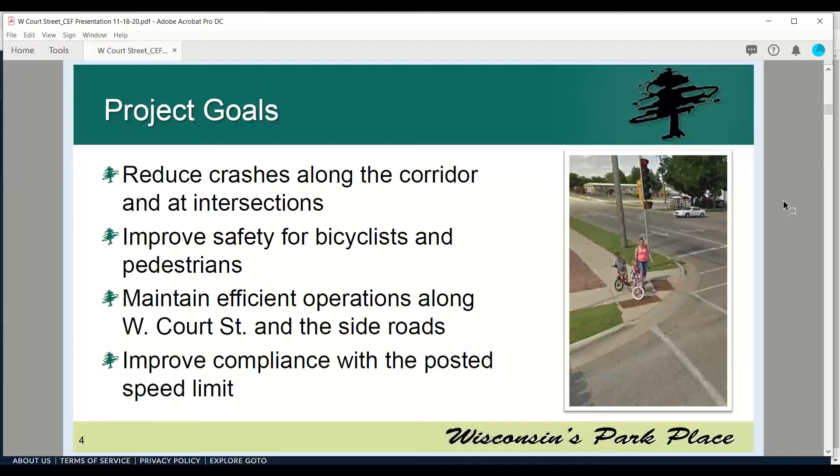Next slide please. So there are 4 primary goals for this project, and it's the reason we are here talking about safety improvement projects on West Court Street. We want to reduce crashes along the corridor and at intersections. We want to improve safety for bicyclists and pedestrians along the corridor. We want to maintain efficient operations along that corridor and the side roads that intersect it. And lastly, we want to improve compliance with the posted speed limit. So those are the 4 primary goals of our project.

With this data, we are drilling down and looking closely at those intersections to identify opportunities to improve safety and look for ways to implement safety improvement projects. And that's where we get to applying for federal aid. There are safety grants and federal aid programs available to help pay for those safety improvement projects.

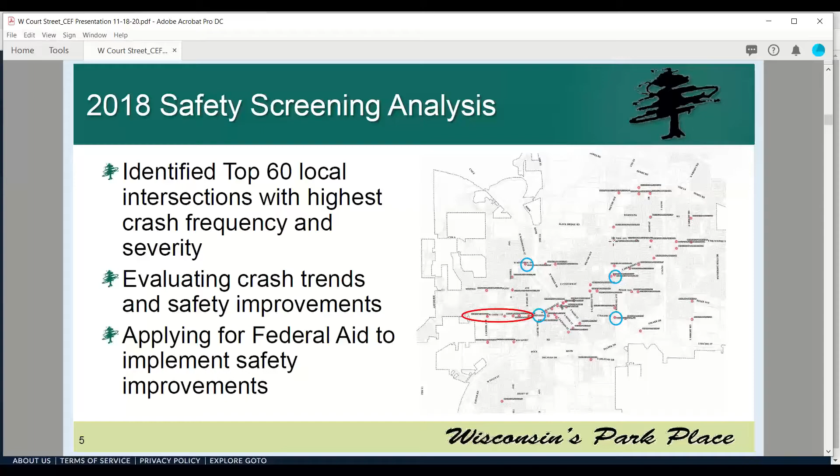You'll see here I've got highlighted, if we want to back up one more, I just want to identify what those circles are. The 4 blue circles on that screen are 4 locations where we've been successful in obtaining federal aid for safety improvement projects. And that red oval identifies really what we're talking about tonight, the West Court Street corridor.

So if we look more closely at that West Court Street corridor, we see that 5 out of the 14 intersections are in the top 60 list. And by 14, I'm talking from Waveland all the way to Pearl Street. So for that length, there are 14 intersections, 5 of which are in the top 60 list. That's over 1/3 of the intersections on the corridor.

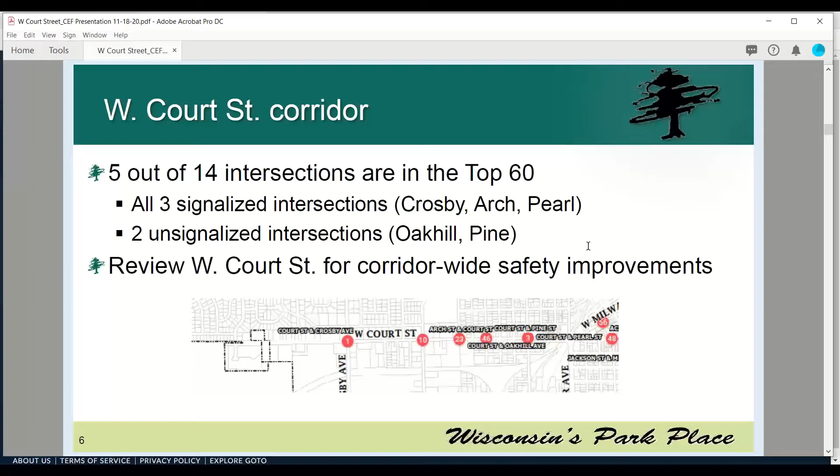I will point out that those include all 3 of the signalized intersections, with number 1, Court Street and Crosby Avenue being the number 1 highest intersection with the highest economic loss in the city for local intersections. And then number 3 is Court Street and Pearl Street. So when we look at that top 60 list, we're identifying some pretty significant intersections where we could see some safety improvements. But knowing that there were so many intersections on that list, we really wanted to evaluate Court Street as a corridor and look at safety improvements that could be implemented along the entire corridor.

That brings us to the 2018 traffic and safety study we wanted to conduct. The limits of that project include a 1.3-mile corridor that goes from Waveland, on the west side of the city, extended east to Pearl Street. We looked at the corridor as a whole, but we also looked very closely at 6 of the intersections and evaluated traffic operations for those 6 locations. Those 6 locations include the 5 that were in that top 60 screening list, and then the T intersection at Grant Avenue.

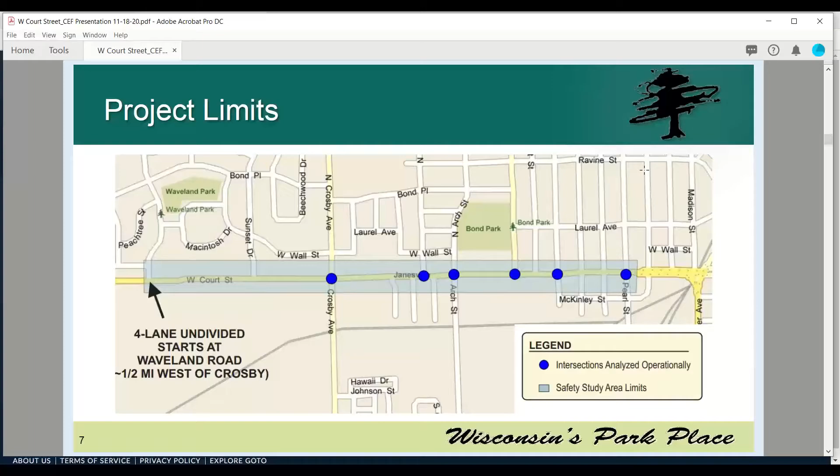For the 2018 traffic and safety study, what were we looking at? We're looking at 2 things: safety and traffic. So we want to first identify what crashes we're seeing on the corridor. We're going to identify some crash patterns, and then determine some safety improvement solutions. But we also want to evaluate operations on that corridor, so we want to evaluate the traffic.

So we collected traffic data at the intersections to get turning movement data. We forecasted those volumes out for a 20-year design life up to 2043, because we know we're going to see additional traffic growth on that corridor. We want to plan for that. We also want to evaluate the operations with any modifications we might be considering based on implementing safety improvements. What we don't want is for our safety improvements to compromise traffic operations. We want to improve both of those things, and that's why we're looking at both the safety component and the traffic component.

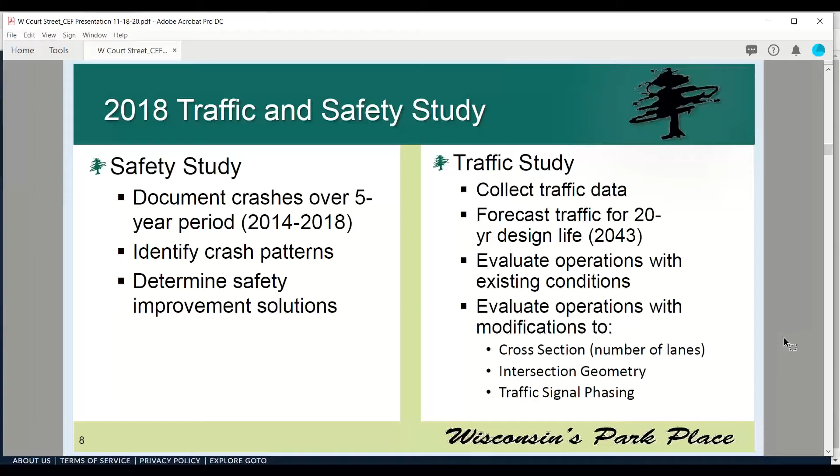The results of the safety study illustrate, unfortunately, that West Court Street has a lot of crashes. It has more than we would expect on this corridor. Over a 5-year period, from 2014 to 2018, there were 164 crashes along that corridor. That includes 2 fatalities, 1 incapacitating injury, and 20 injury crashes. Also of note, those crashes included 16 bicycle and pedestrian related crashes. And as we all know, a crash with a bicyclist or pedestrian tends to result in higher injuries because we're talking about vulnerable users on the roadway. Overall, the corridor crash rate on West Court Street is more than double the statewide crash rate.

On the right, it shows an image of a collision diagram. Basically what TADI did as part of this analysis is map out the locations of every crash along the corridor to identify trends and potential solutions for how we could reduce those crashes. So that's what we're looking at from a safety perspective.

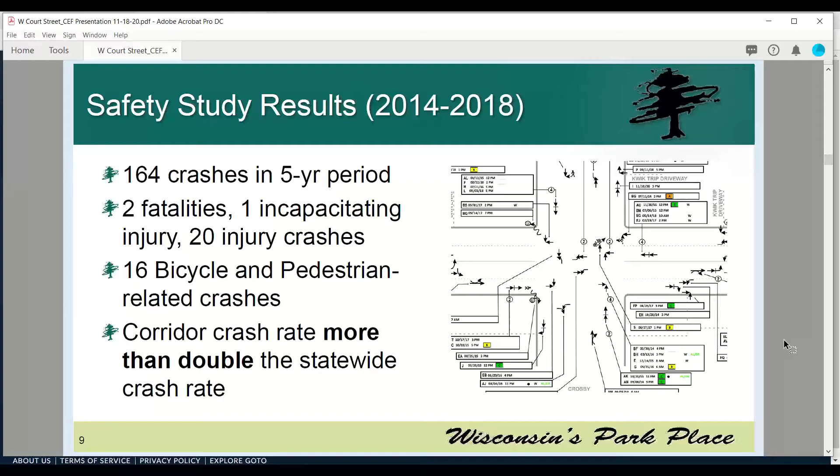As far as the traffic safety or this traffic study results go, we looked at 4 scenarios. The top 2 scenarios, the 2018 traffic with existing conditions and the 2043 traffic with existing conditions, we wanted to establish a baseline. We wanted to establish where things are today and what will happen in the future as we see additional traffic on the corridor.

The last 2 scenarios show how we expect operations to work with some recommended improvements, meaning what modifications to the corridor we're looking at to address safety and traffic, and how those operations will change with those modifications in place.

I'll also note that we've modeled both the AM and PM peak hour, the highest hours of travel on the corridor: 7:15 to 8:15 a.m. and 3:15 to 4:15 p.m.

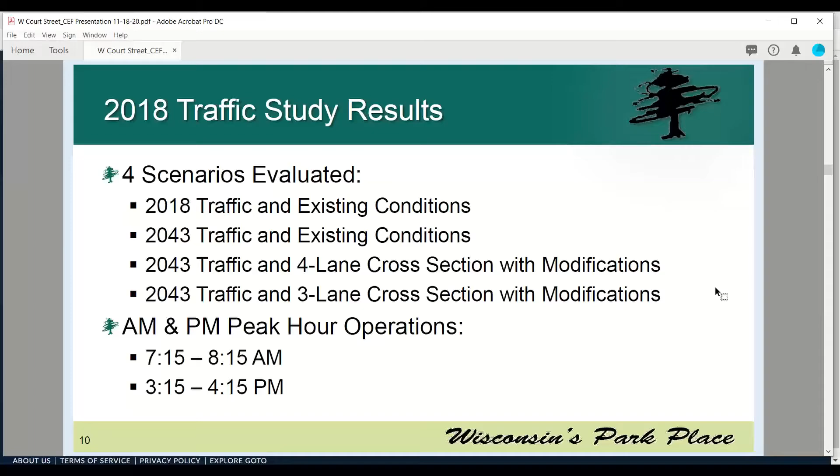Before we get into the results of that traffic study, I want to talk a little bit about how we measure operations at intersections. It's based on delay, and it's called level of service. The level of service represents how well the intersection is functioning with that much traffic.

Drivers tend to accept more delay at a signalized intersection because they know at some point their light's going to turn green and they'll get the opportunity to travel through. At an unsignalized intersection, it's dependent on a gap, so for that level of service, it's a lower threshold for the amount of delay considered acceptable.

In general, level of service D is considered acceptable operations. The reason is that we're modeling the highest hour of the day, and if we can get level of service D at the highest hour, we're going to have great operations during those off-peak times.

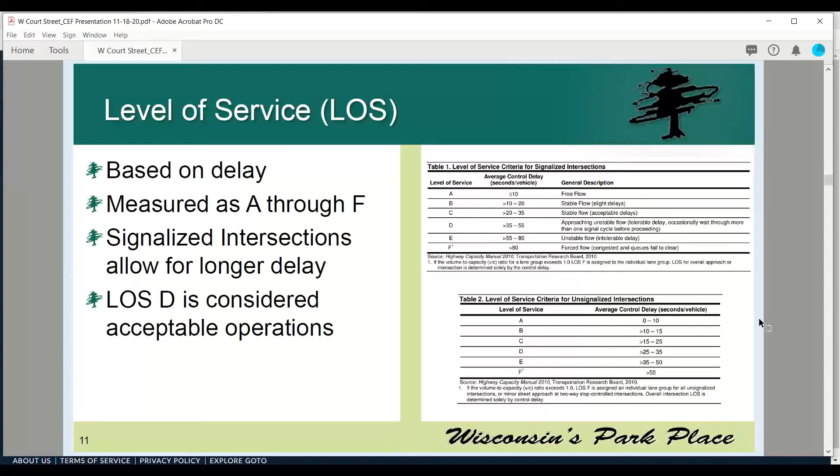A few things to note quickly. Level of service D, just to give a frame of reference, for a signalized intersection is right around a minute, so up to 55 seconds of delay is considered acceptable during that peak hour. At an unsignalized intersection, that drops to 35 seconds of delay.

So when we looked at the modeling of existing traffic, the 2018 traffic turning movement volumes that were collected, and the existing 4-lane cross-section, we modeled each of those 6 intersections, listed on the table at the right. What I'm trying to highlight here is where we know we've got some potential congestion or some potential issues.

Existing today, what we're seeing is that really all movements operate at a level of service D or better, with the exception of the westbound movement on Court Street at the Crosby Avenue intersection during the peak PM hour. At that location, we're seeing level of service E with 58 seconds of average delay. That's just above our level of service D, so we're just starting to see that movement start to fail.

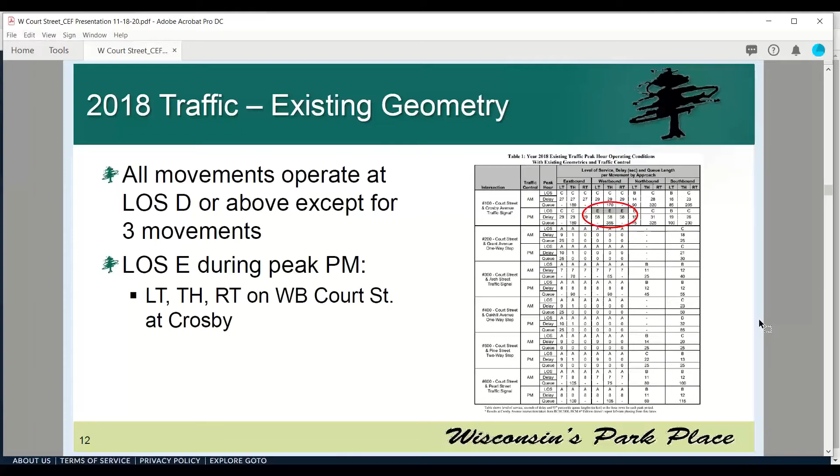As we project to 2043 traffic, looking 20 years out, we've added traffic to the model to reflect what conditions will be like. What we see, probably no surprise to anyone, is conditions get a little bit worse. Now the westbound Court Street movement at Crosby is a level of service F, circled up above, with 230 seconds of delay on average. That's just about 4 minutes, which is kind of unacceptable, and we'll need to address that with some improvements.

In addition, you'll see that the southbound movement on Oakhill is also experiencing a level of service F. That's a stop-controlled, unsignalized intersection on Oakhill, showing 61 seconds of average delay in this scenario.

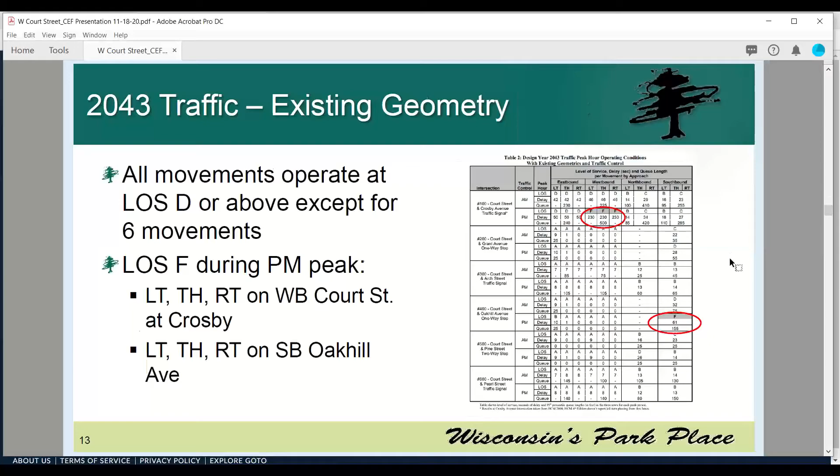The next scenario we looked at is that 2043 traffic, but let's optimize operations on the corridor with that 4-lane typical section. We see slight improvements. The goal is to get rid of some of those level of service F ratings if we can and try to optimize those operations. The modifications modeled in this scenario focus on the Crosby and Court Street intersection, because that's where we're seeing that significant traffic congestion starting to occur. What we did is adjust cycle lengths and signal phasing for optimal operations.

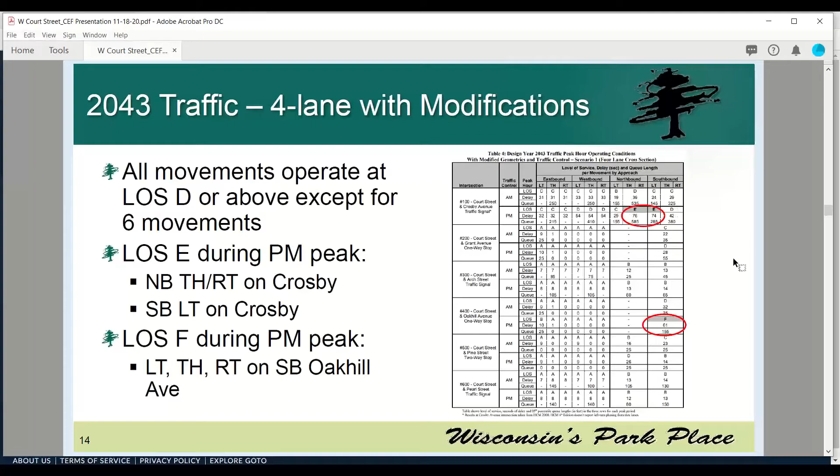We reconfigured the north and south left turn lanes on Crosby Ave to be aligned across from each other to improve visibility, and looked at having those northbound and southbound left turn movements operate with a flashing yellow arrow, which is a permissive left turn movement. That cleared up congestion on West Court Street, but we do see some delay for that Crosby Avenue approach, north and south, and no change at the Oakhill Avenue intersection in this scenario.

The last scenario we looked at is the safety conversion scenario. The safety conversion is a 3-lane cross-section that consists of 2 through lanes and a center 2-way left turn lane. We modeled the corridor on that 3-lane cross-section.

In addition, we looked at modifications focused on the Court Street and Crosby Avenue intersection, including the same ones as before: adjusting cycle lengths and signal phasing, reconfiguring the north and south left turn lanes to be aligned across from each other, and having those left turns operate with a permissive left turn or flashing yellow arrow movement. We also looked at adding dedicated right turn lanes on Court Street at the Crosby Ave intersection.

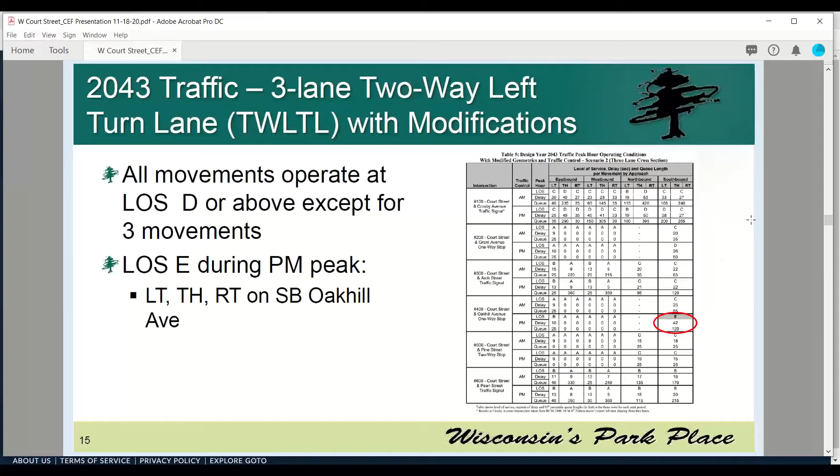This scenario really offers the best operations of all the ones we've looked at, providing the best level of service at each of the 6 intersections evaluated for this study.

Based on the crash review analysis and the operational analysis, the results of the 2018 study included the following recommendations. It recommended the city consider a 3-lane, 2-way left turn lane cross-section on West Court Street, also called a safety conversion. The reason is that it shows acceptable operations compared with the 4-lane, and I would argue even potentially better operations, and it also offers research-proven safety benefits, meaning we'll see the ability to reduce crashes on the corridor.

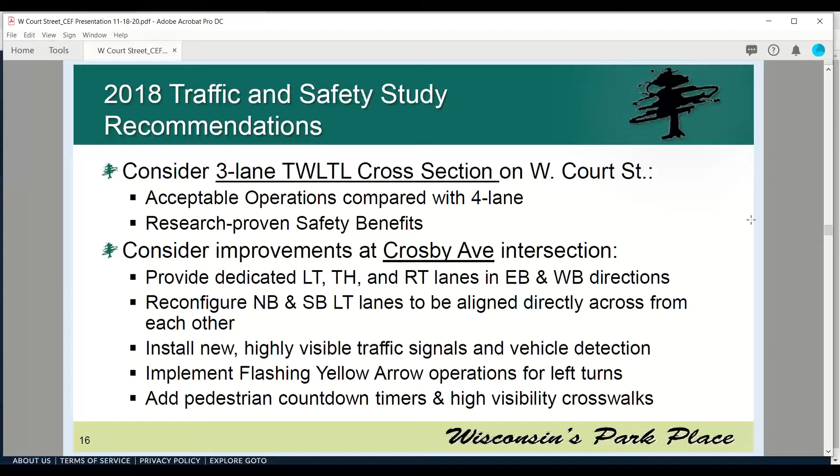The second recommendation was to consider specific improvements at the Crosby Avenue intersection, specifically providing dedicated left turn, through, and right turn lanes in the eastbound and westbound directions, reconfiguring the northbound and southbound left turn lanes to be aligned directly across from each other, installing new highly visible traffic signals and vehicle detection, implementing that flashing yellow arrow, and adding pedestrian countdown timers and high visibility crosswalks.

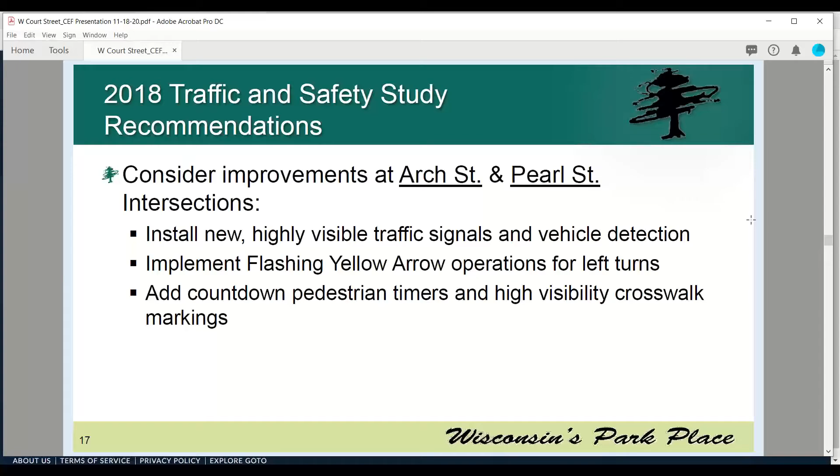The last recommendation was to also consider similar traffic signal improvements at Arch Street and Pearl Street, specifically installing new highly visible traffic signals, implementing flashing yellow arrow operation for left turns, and adding countdown pedestrian timers and high visibility crosswalk markings.

At this time, I would like to turn the presentation over to John Campbell, who will go into more detail on the safety benefits of safety conversions, the reasons this is a good fit for West Court Street. He'll provide examples of other successful conversions and share traffic modeling simulation videos to illustrate how the corridor will operate with the safety conversion. So John, take it away.

Thank you, Anna. Very well said traffic operations analysis from one traffic engineer to another. I'm impressed.

What are some of the reasons we saw such a poor safety performance on Court Street? One of the reasons, and I'll go over several of them, is it has characteristics similar to a 4-lane undivided roadway, because that's what it is. 4-lane undivided roadways have lots of conflict points.

Conflict points are locations where vehicles could potentially collide with each other or with a pedestrian or bicycle. On these types of corridors, we see lots of merging crashes, rear end crashes, and right angle, left turn angle crashes. Those are very common crash types on 4-lane undivided roads.

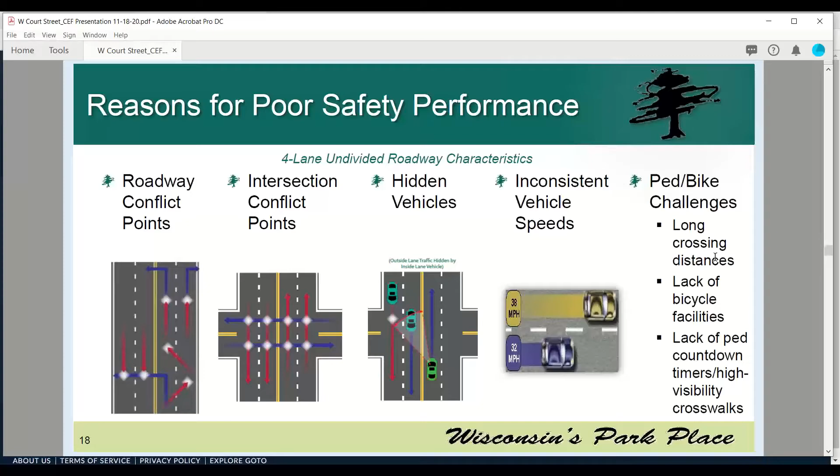So what are some things we can do to improve safety? Number one, we want to reduce conflict points. When we're looking at a roadway project where we want to improve safety, we want to reduce the opportunities for vehicles to collide with one another. We also want to improve the visibility of approaching traffic.

Throughout my career, I've looked at well over 10,000 crash reports, and I can assure you that nobody purposefully drives into another person or another vehicle. Very many times they turned and just did not see the approaching vehicle, whether their vision was blocked by another vehicle in another lane, or if it was another sight obstruction, like a tree encroaching near the intersection. People don't purposely drive into others.

Another thing I've seen happen a lot is when you get into complex situations where drivers are trying to cross, let's say, 4 lanes of traffic, which happens on a 4-lane undivided roadway. It just becomes cognitively too difficult. There's just too much information for the human brain to process for some drivers, and they make decisions where they may not see the approaching vehicle because their brain's focused on the elements they can process.

Another way we can improve safety is enabling consistent vehicle speeds. That really reduces lane changing, the need to pass. It also helps people on side streets choose appropriate gaps because they can better estimate how long it'll take for an approaching vehicle to get there.

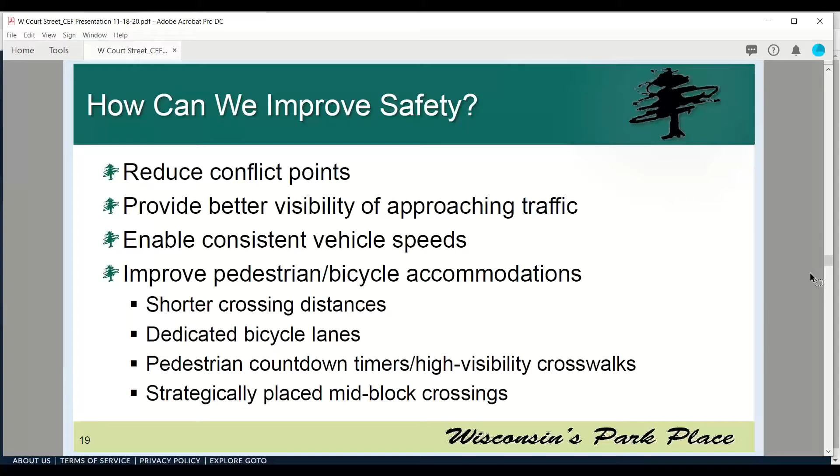And then we want to just draw attention and visibility to pedestrians and bicyclists through better pavement marking, features like countdown timers, and strategically placed crossings for pedestrians, potentially at mid-block locations.

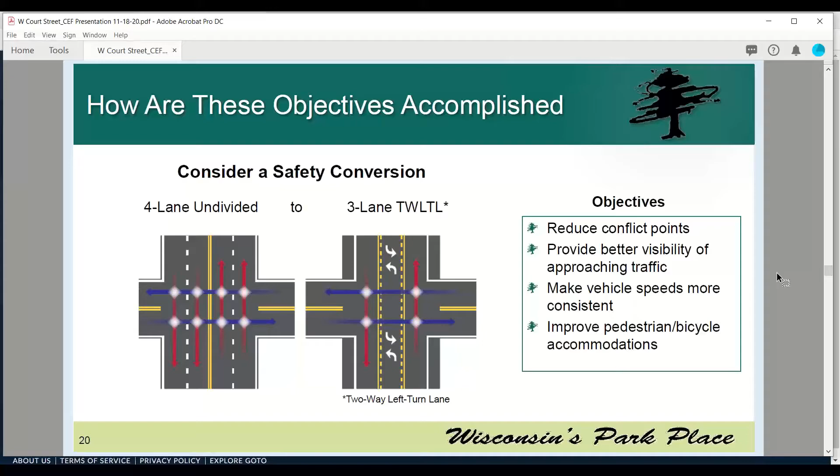So how are these objectives accomplished? Those would be great things to do, but how do you do them? One way to accomplish them on a 4-lane undivided roadway is to consider a safety conversion. What is a safety conversion? Anna talked a little bit about this, but it's really the repurposing of a roadway that accomplishes these objectives of reducing conflict points, providing better visibility of approaching traffic, making vehicle speeds more consistent, and really fosters an environment for improving pedestrian and bicycle accommodations.

A safety conversion is really about optimizing the roadway space. You take a 4-lane cross section and you repurpose it and improve it, and you try to get more out of the roadway without having to widen it. It involves converting the 4 automobile lanes on the roadway to 3 automobile lanes, one through lane in each direction, and then a center 2-way left turn lane, which harbors the left turn traffic.

Also, because there's usually a little extra space then, it gives you the ability to put in bicycle lanes. It's commonly called a road diet in literature, but we believe a safety conversion is a much more appropriate name for them. They're also called a 3-lane, 2-way left turn lane, or a twiddle.

Some features about a 3-lane twiddle or safety conversion is that it maintains business access, which is really important, and in many cases actually improves business access because it provides a dedicated left turn lane into driveways along the corridor. It usually has a very small impact on overall corridor travel time. That may seem counterintuitive. Hey, how are you going from 4 through lanes to 2 through lanes and still maintaining the same travel speeds and corridor time?

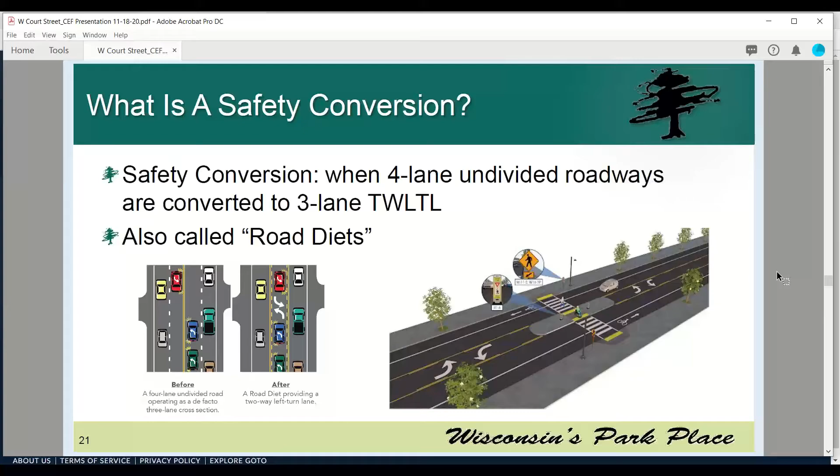So why do we think West Court Street is a good candidate for a safety conversion? There are a couple main reasons. Number one, traffic volumes. We forecasted traffic all the way out to 2043, and we expect those volumes to be well within the capacity of what a 3-lane cross-section can handle. They can handle volumes up to 26,000. West Court Street is now and where it's projected to be is in a very favorable range for conversion to 3-lane cross sections.

Number 2, intersection performance. Oftentimes, as I just mentioned, the intersections tend to control the capacity of the roadway more than the number of lanes on the roadway. And as Ahna explained, we saw some really good performance at the intersections with the 3-lane cross section all the way out to 2043.

Number 3, we think it's a good candidate because of the number of pedestrian and bicycle crashes that have occurred—16 ped and bike crashes in a 5-year period, including 1 fatal pedestrian crash. It's a staggering number, and it's evident that vulnerable road users are using this roadway and corridor not only to access businesses, but where they live and function in their lives. So we think it will vastly improve conditions for pedestrians and bikes.

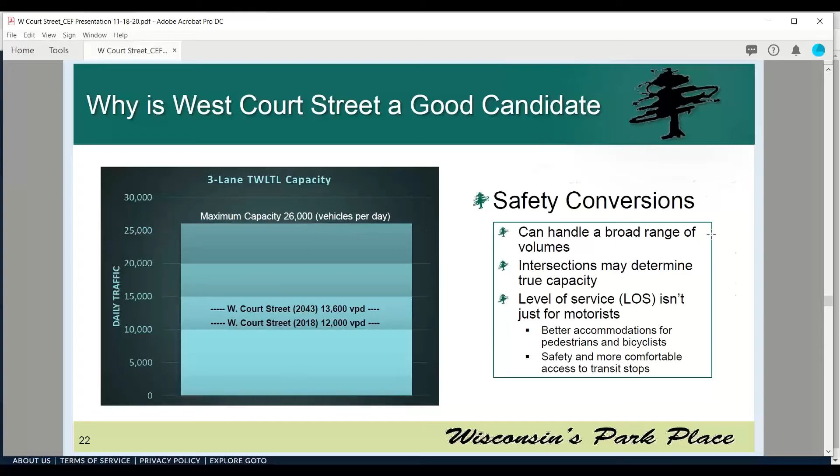So perhaps you didn't learn about a 3-lane twiddle, a road diet, or a safety conversion in driver school. They were new to me at once too, but that's because they haven't always existed. One of the first known installations of a safety conversion was in 1979, and they didn't really start growing in popularity until the 1990s. But today, in 2020, they're standard practice, located all over the country and throughout Wisconsin.

In 2012, the Federal Highway Administration identified road diets, or safety conversions as we like to call them, as a proven safety countermeasure. They were able to prove this through rigorous before-and-after benefit studies. The Wisconsin DOT is an advocate for road safety conversions and has had many successful conversions throughout the state. They estimate, on average, a crash reduction of about 30% when these are installed on 4-lane roadways.

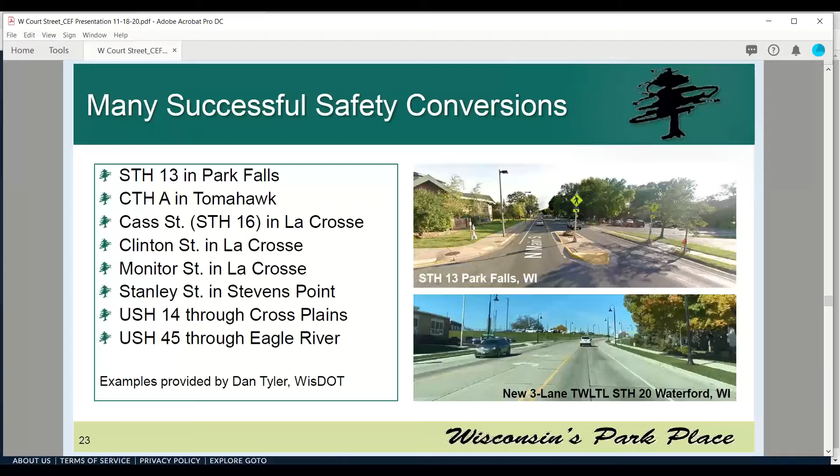I wanted to show you an example of a very successful safety conversion in Oshkosh, on Murdock Avenue. This roadway has some of the same characteristics as Court Street and had similar daily volumes. I also wanted to show it as an example because it was met with a lot of resistance at first.

The engineering staff had done a thorough review of the traffic and safety along this corridor and presented the safety conversion as the preferred option to convert the roadway and make it more safe and efficient. At first, it was voted down by the Common Council there, and it took a little back and forth before it was eventually installed. So I just wanted to highlight that sometimes these roadways can be met with some initial opposition, but after they're installed, they tend to really operate smoothly.

We looked at the before-and-after crashes on Murdock Avenue, and it was extremely successful at reducing crashes. Total crashes went down 72%, injury crashes almost 80%. And on a corridor that had 7 ped and bike crashes in 5 years before the install, it had 0 in the 4 years after. That was just from reconfiguring the roadway with a safety conversion—the curb and gutter wasn't changed, it was just painted differently to better optimize that roadway space.

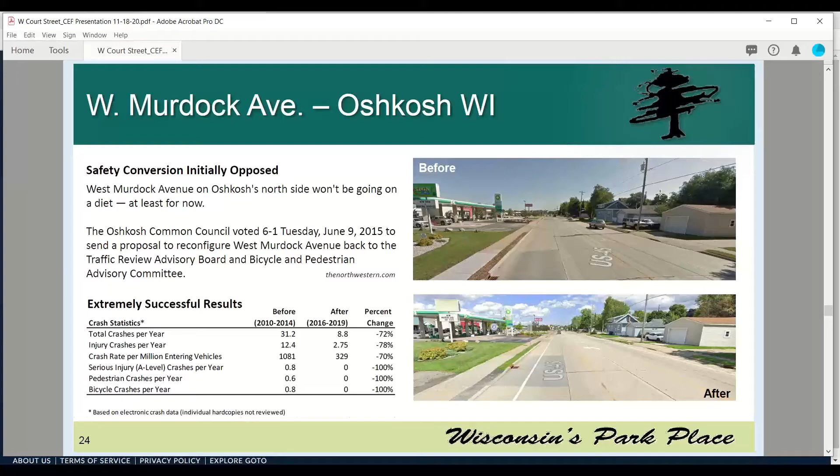To help illustrate how this corridor would look and operate after a safety conversion, we put together 3 simulations of the worst case scenario looking out to 2043 in the PM peak hour. I will briefly show the simulations, about 3 minutes each. I won't go through the complete simulation, but they're available on the Social Pinpoint site. I'll just point out what each simulation shows.

The first one shows the complete corridor, beginning on the far west end at Waveland Road, showing what this cross-section could look like after a safety conversion, with simulated traffic from that PM peak hour out in 2043.

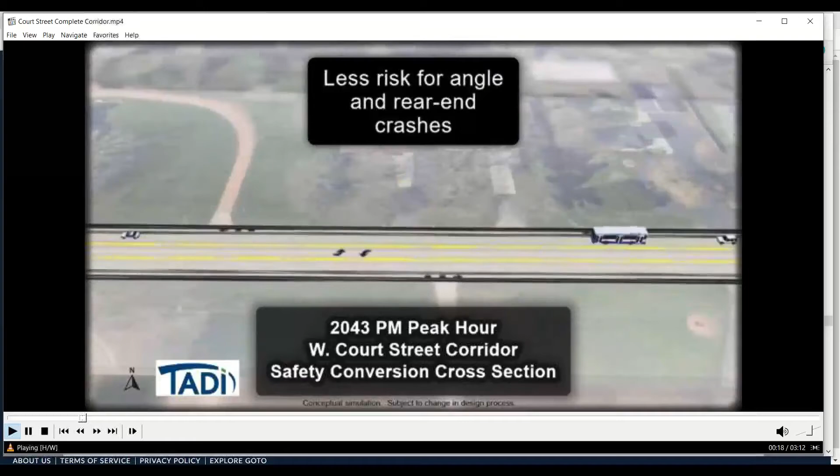I did want to note that this is a conceptual representation. It's obviously subject to change in the design process, but we wanted to give you a vision of what this corridor could potentially look like after a safety conversion is implemented.

As we go along the corridor, you'll see vehicles traveling in that through lane with what appears to be consistent vehicle speeds. Further along, there'll be some interaction with vehicles turning out of driveways. Here's a motorist waiting and making a left turn out.

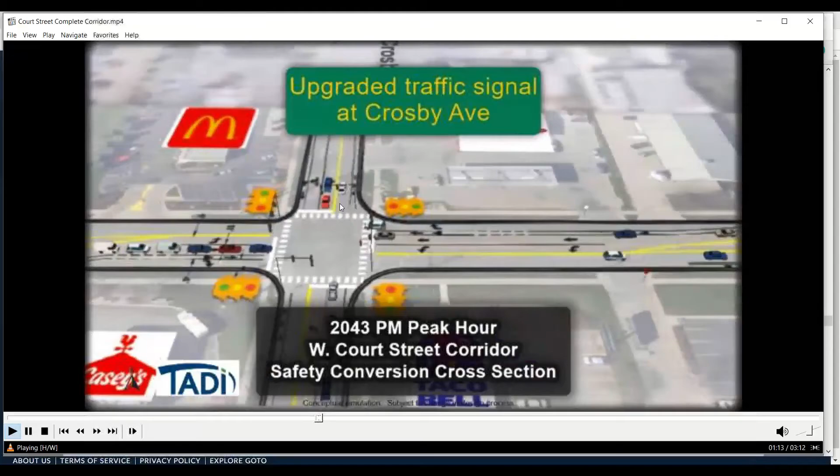We're approaching the major intersection on this corridor, the traffic signal at Crosby Avenue. I'll pause here to highlight some features: high visibility crosswalks, improved lane utilization with exclusive right turn lanes, left turn lanes, and a through lane, plus improved signal visibility with overhead traffic signals. You can see how that pedestrian stands out on the high visibility crosswalk, even in a simulation.

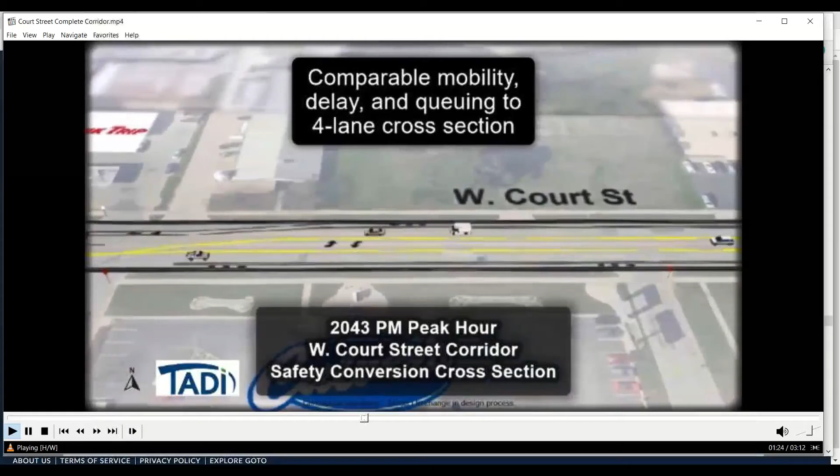There's a motorist that used that left turn lane to turn in. I'll skip ahead a little to get more interaction, with drivers making some movements in and out of the roadway here.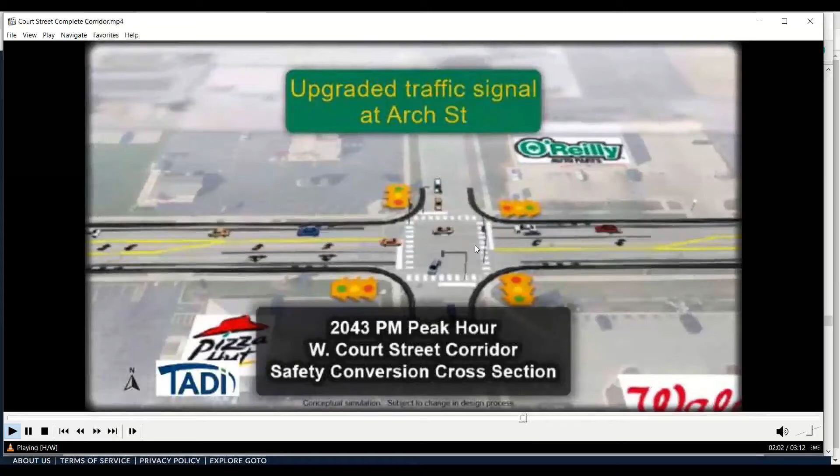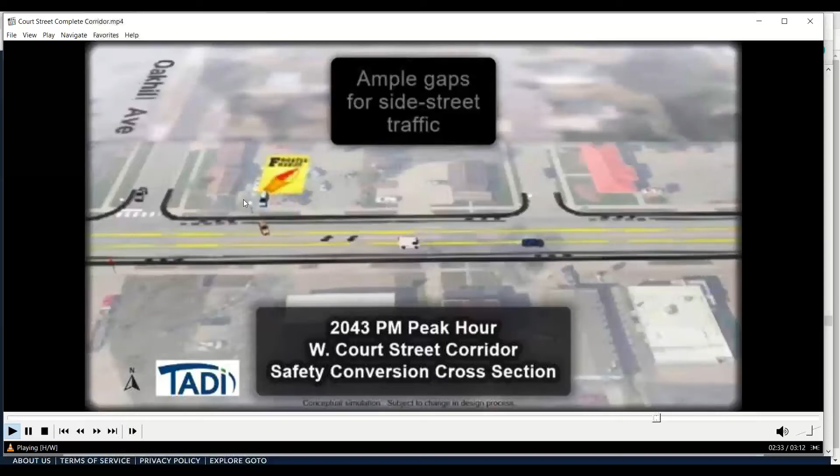There'll also be an upgraded traffic signal at Arch Street. Here's some more drivers exiting. Skipping ahead, here's Oakhill Avenue, one of the busier side streets, with a vehicle turning off of Court Street, and here's some people leaving the drive-through lane at Frosty Freeze and turning onto the corridor.

The next simulation is specifically at Crosby Avenue, a major intersection on the corridor. I'll show this video to show how this operates, projected out to 2043.

These northbound and southbound left turns are better aligned, providing better visibility of approaching traffic. There's a pedestrian crossing the east leg of the intersection.

This is a 3.5-minute video that's available on the Social Pinpoint site. Please view it, check it out. It shows how we anticipate this intersection will operate.

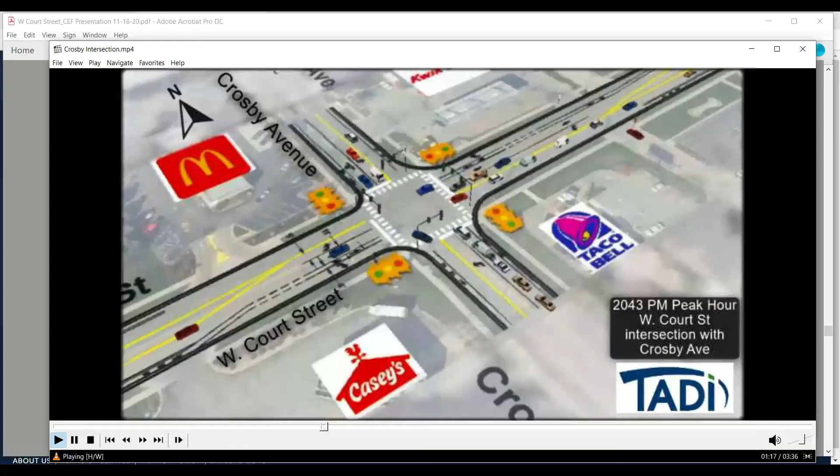Later in the video, there'll be some driveway interaction, vehicles getting in and out of these driveways. You can also see queuing if you watch the simulation, showing how far that queue would extend in all of the quadrants during that peak hour, and how those queues clear out with the signal operations.

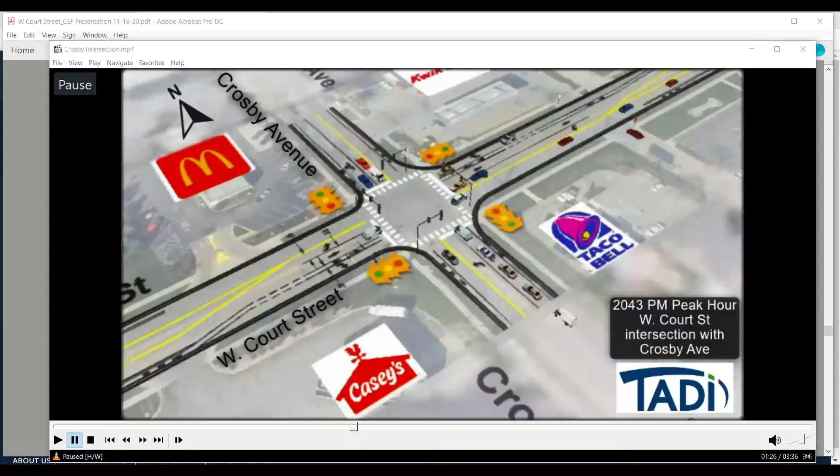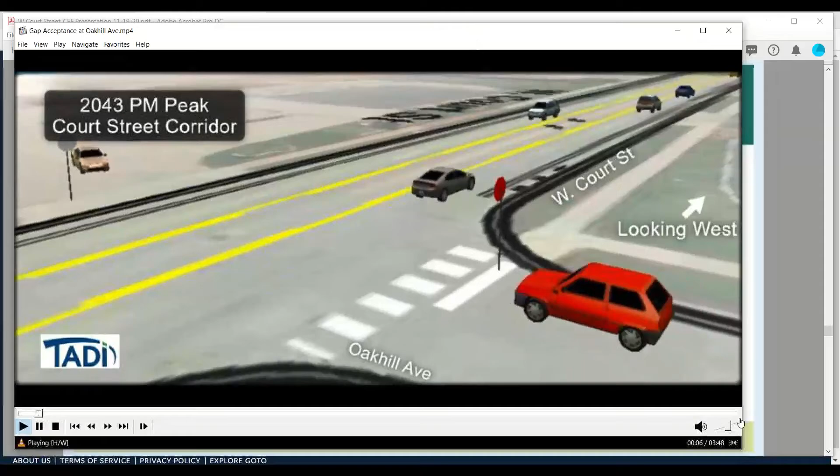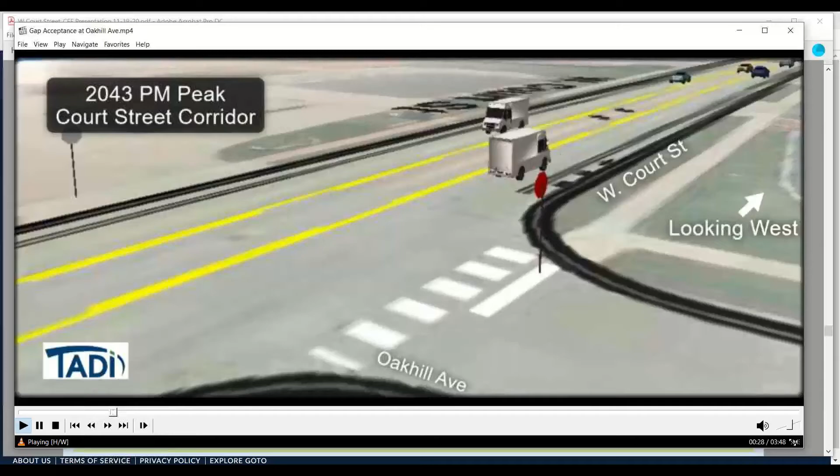Lastly, the third simulation is more from the driver's perspective of trying to pick and choose gaps to turn onto or across Court Street. This is a concern that gets brought up a lot in 4-lane to 3-lane conversion projects: will there be enough gaps for the side street drivers to safely get on the street?

Oakhill Avenue, being one of the busiest intersections that isn't signalized, is a real good example to show that there are available gaps, actually ample gaps, to get vehicles in and off of that roadway safely.

This video is kind of broken into 2 parts. It shows the perspective looking to the west for the first half of the video, and then we flip over and look to the east for the second part. This should help you visualize more at the street level what this corridor could potentially look like.

Here's some left turners looking to turn onto Oakhill Avenue. They're going to safely maneuver into that 2-way left turn lane, and then they're just going to wait until they have a gap to complete their maneuver.

I'll just show a little bit on the screen here, the other vantage point looking to the east.

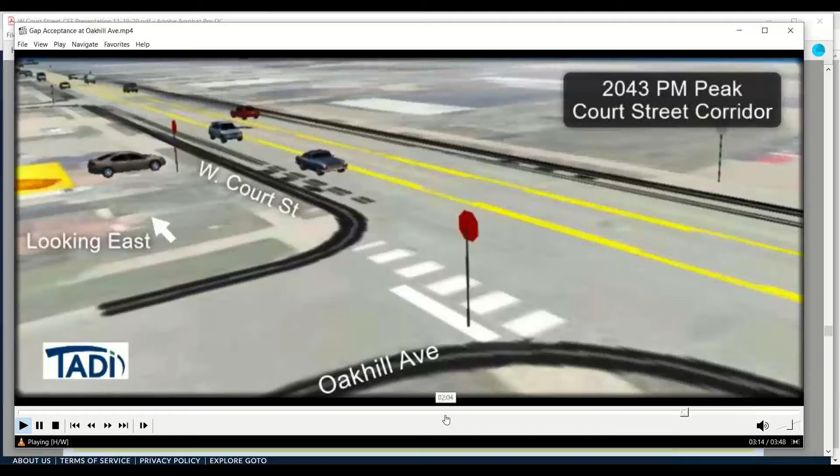The real intent for doing this level of analysis is to ensure that this cross-section does not diminish the operations on the corridor. That's really what we wanted to identify and determine: will there still be adequate gaps to allow people to turn onto the corridor on the side roads, and will there be adequate operations at those signalized intersections for the Court Street traffic as well as those side roads. So I hope that people take the time to take a look at those, and I hope that they find them helpful.

All right, so we were able to do the traffic simulations of this roadway out to 2043, and that gave us the opportunity to look at, hey, what is the travel time from the far west side of the corridor to the far east side of the corridor? Is that 3-lane cross section going to slow up travel from one end to the other? Research and previous examples have shown that it shouldn't.

It might on a very high volume corridor when you start getting into the 20,000 to 25,000 vehicles per day range, but on a corridor like Court Street, that's more in the 10 to 13,000 range of volumes per day. We anticipated results that would show travel time did not change much, and that's what the results showed. We ran 10 simulations, and it had a minimal impact on corridor travel time. It was 227 seconds to traverse the corridor on average using the safety conversion cross section, and 211 using the 4-lane cross section. That's about a 16-second difference, so the difference is in seconds, not minutes.

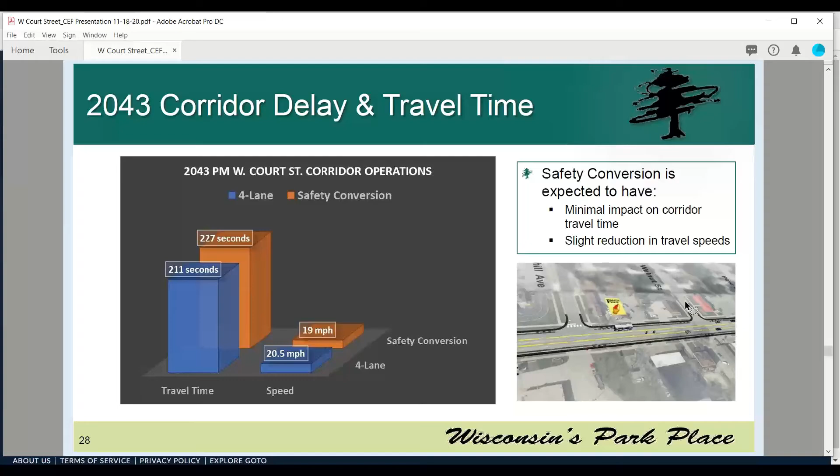And then as far as speed, we just took a look at what the average speed to get from point A to point B across the whole corridor was, and we saw a slight reduction in travel speeds, which is good for pedestrian and bicycle safety throughout a corridor. Every mile per hour matters.

And then lastly, I wanted to speak on crash reductions and what the real impact of those are. We said crash reductions of potentially 30%, or a range up to 47%. In Oshkosh, they saw a 78% crash reduction of injury crashes. That's fine to mention, just throw out those percentages, but I really want you to help visualize what even achieving a 30% crash reduction on Court Street would do.

Over the next 10 years, a 30% crash reduction would be 100 fewer crashes on that Court Street corridor, which would result in 100 fewer police responses, because most crashes have 2 vehicles in urban situations like that. That's 200 vehicles that would not be damaged. And since the average occupancy of vehicles is about 1.5 people, that's nearly 300 vehicle occupants - people in your community or visiting your community - who won't be involved in a car crash over the next decade. So when we set and achieve goals of crash reduction, there are real impacts to roadways and communities.

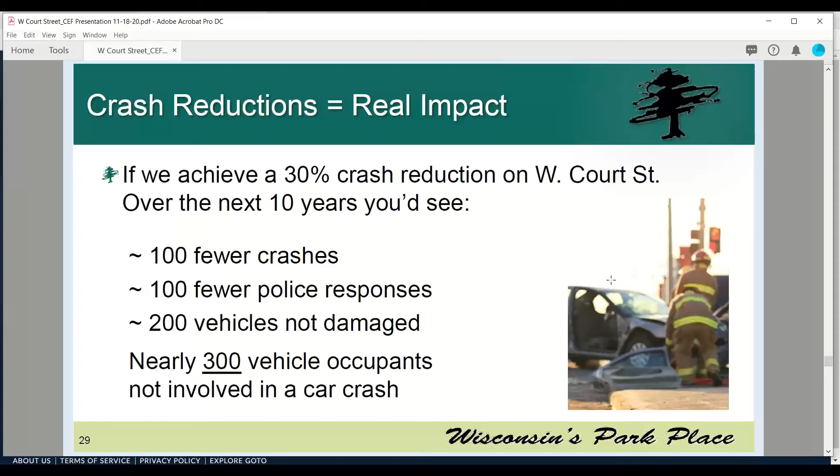And that concludes my information about safety conversions and what some of those safety impacts can be.

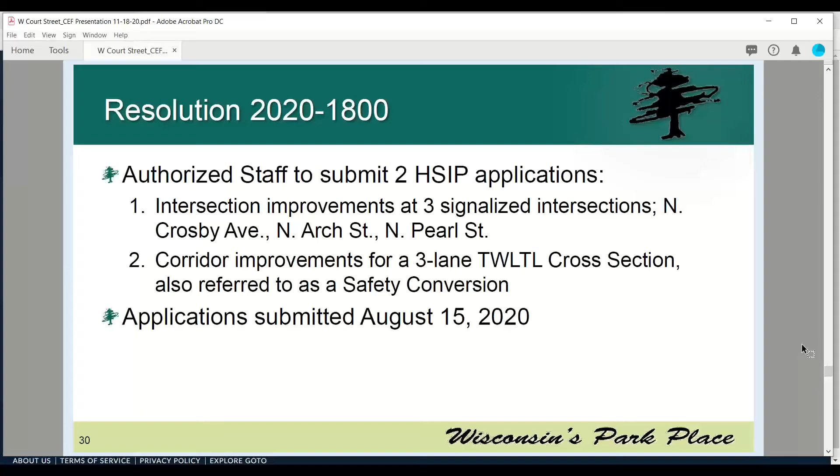So based on this analysis and the work that we've been looking at, a resolution was passed in August that authorized staff to proceed with submitting 2 Highway Safety Improvement Program applications. This is a federal aid program that allows funding to be available for projects that qualify for a documented safety improvement, meaning you have to demonstrate that the improvements you're recommending will have a real impact, like John described, for reducing crashes and improving safety. So 2 applications were submitted - the first focuses on intersection improvements, and I'll get into that in more detail. The second application is specific to the corridor and is based on that 3-lane cross-section, or what we've been calling the safety conversion. Those applications were submitted in August.

What we are showing here is specific to the signal intersection application that was submitted. It focuses on the 3 signalized intersections, and on improvements John and I have been talking about - enhancing the visibility of the traffic signal, improving the operations at those signals, and enhancing pedestrian accommodations. We're talking about things like overhead traffic signals, a signal head per lane, and retroreflective backplates. You'll see in these images this orange rectangle around the signal - it just provides more visibility of the signal head itself. There's also the pedestrian countdown timers we've been talking about, and high visibility crosswalks. All of those improvements are identified in this application for the 3 signalized intersections: Crosby, Arch, and Pearl Street.

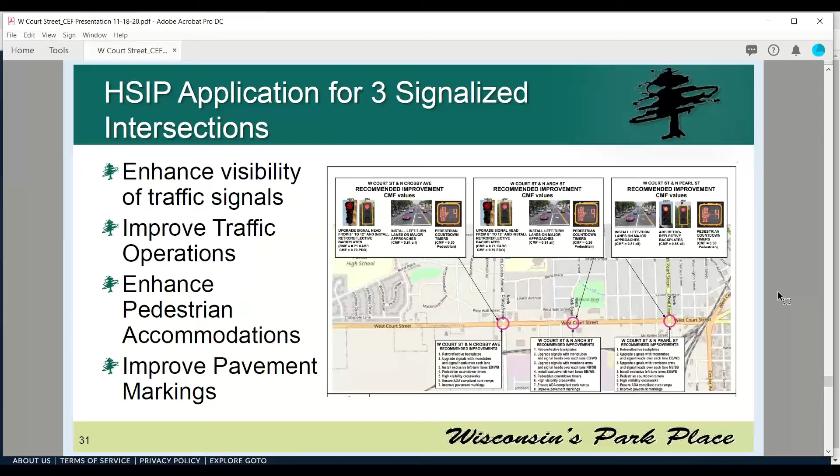Next slide, please. So an overview of those projects and the funding that is required for them.

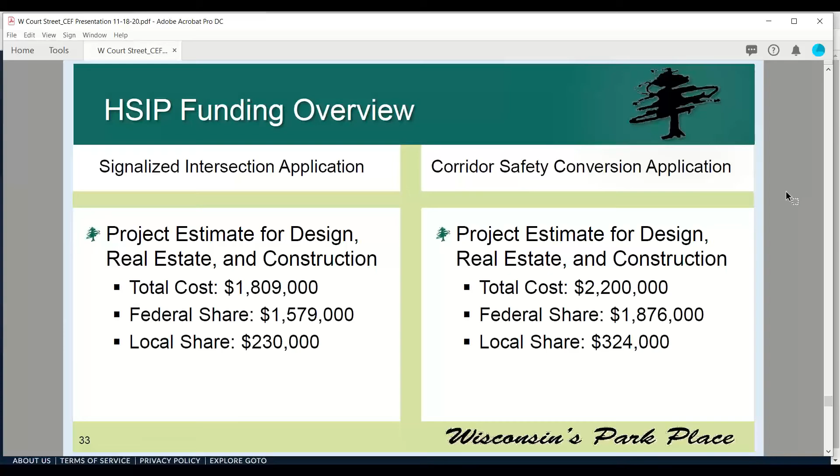So in total, we are looking at a $4 million value in investments or improvements along this corridor, with $3.45 million in federal dollars and a $554,000 local investment. One thing I want to mention related to that real estate: the intent with this project is not to move the curb and gutter along the corridor, but we do anticipate the potential need for right-of-way where we would be widening to add left turn lanes at Crosby Ave, or where we need to make modifications to the accessible ramps at the intersections located along the corridor.

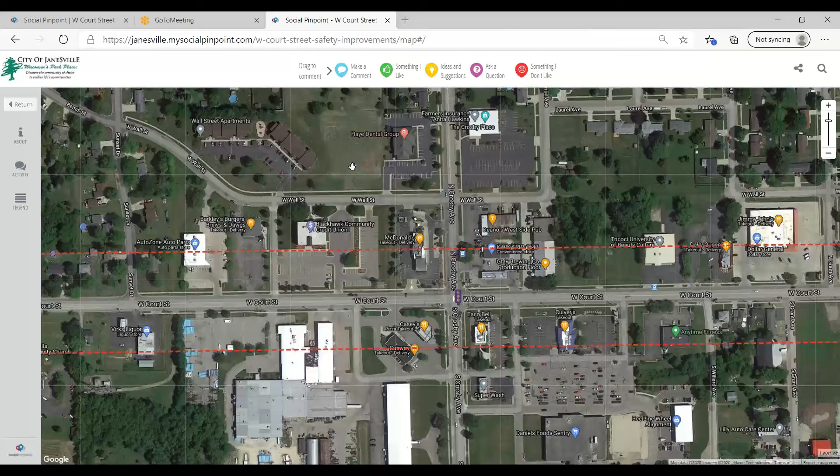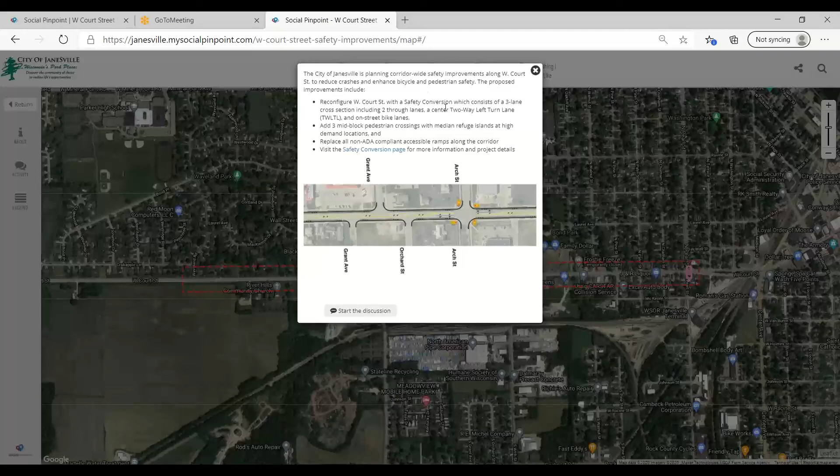That should bring up a window that's going to describe the safety conversion project and give an image. You can start a discussion. So if you click on that text bubble, it brings up a window where you can provide your feedback or your thoughts on that.

In addition, if you want to close out of that, John, along the top of the map you'll see there are some icons. They say things like make a comment, something I like, an idea or suggestion, ask a question, something I don't like. You can drag one of those icons down onto the map, and when you do that, it will bring up a similar window. You can provide your comment and hit add comment, and that's how we're going to be collecting people's feedback on this project. If you go back to the return button, John, on the far left.

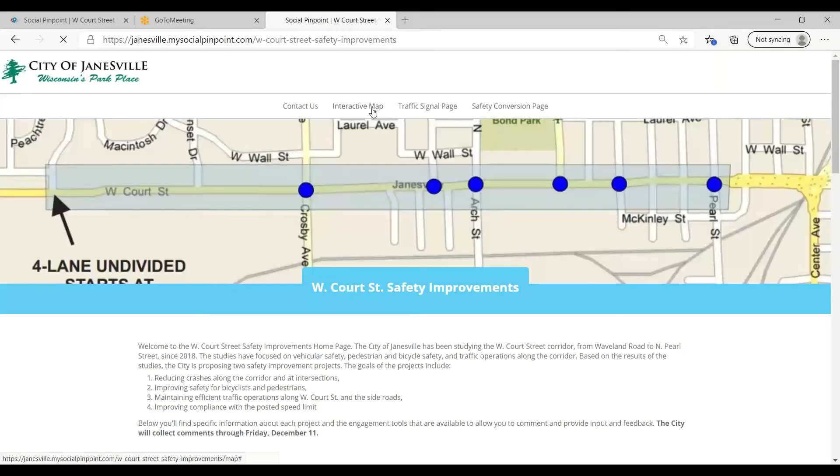Yeah, that one right there. That's just going to bring us back to that home page. If you'd scroll down just a minute, I just want to click on this—so we've got two additional pages with information.

The traffic signal safety improvements is on the left. If you click learn more, that's going to bring up another page with specific information related to the traffic signal project. On the right, there's some drop-down information, so you can click on one of those arrows. It will bring up additional information specific to that particular intersection.

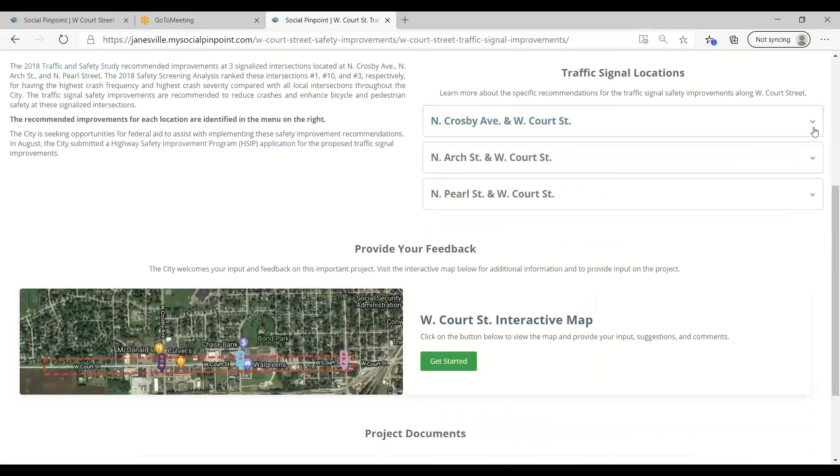So we invite you to explore the website. There's a ton of information there. If you are not comfortable using the website, certainly we will accept comments through calling in, providing written comment, or emails as well.

Because we don't have a large group here, if people have a specific question that they'd like to ask, now would be an opportunity for you to do that.

I would like to ask a question. Hello? Yes, of course. Since this is going to run from 2021 through early 2026, will all of the traffic patterns from, say, Milwaukee on the other side of the courthouse, down through downtown Janesville and out across, coming towards Court Street, heading out to perhaps Footville—is that all going to be connected and patterned together over that 4 or 5 years, or is that going to be jerry-rigged? Is your question related to other construction projects happening in the city and how they relate to Court Street, to this project?